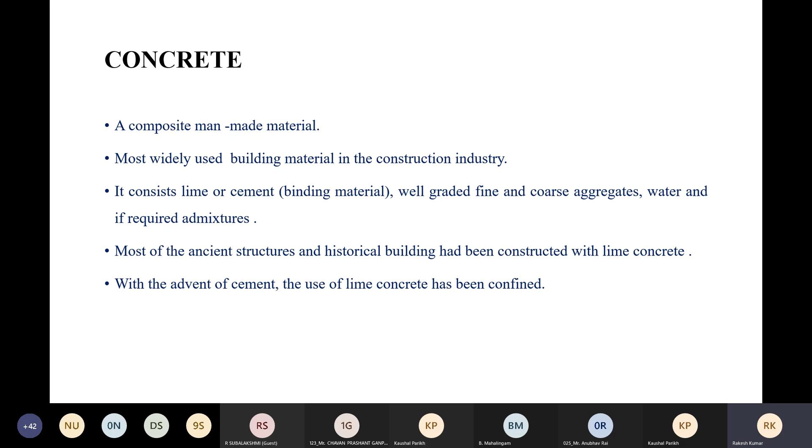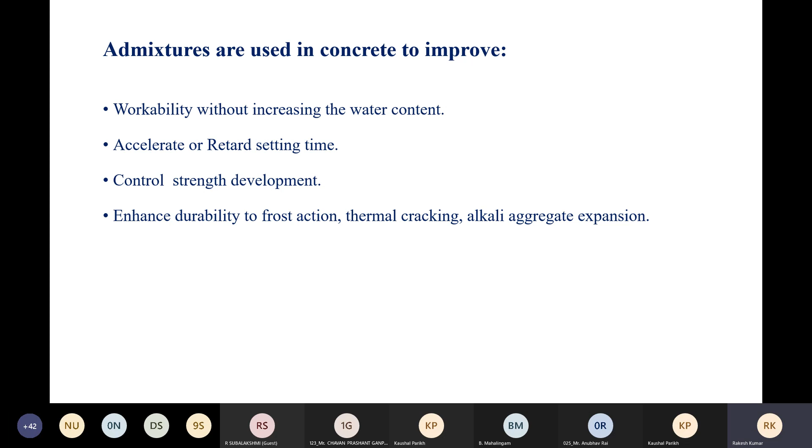Admixtures are used in concrete to improve workability without increasing water content, as accelerators or retarders to accelerate or retard the setting time, control strength development, enhance durability to frost action, thermal cracking, alkali aggregate reactions, sulfate attack, corrosion of reinforcement, reduce bleeding and segregation, and reduce the rate of heat evolution.

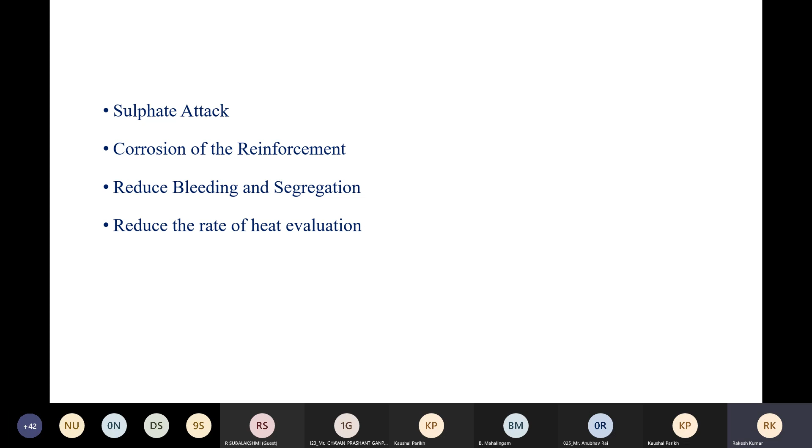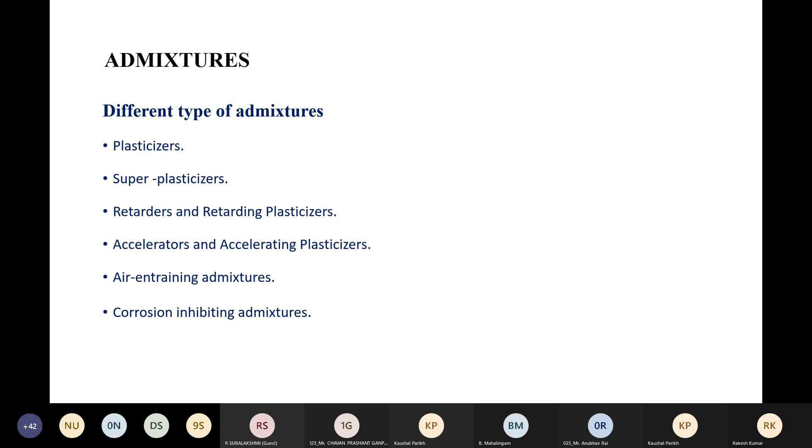Different types of admixtures are available in the market: plasticizers, super plasticizers, retarders and retarding plasticizers, accelerators and accelerating plasticizers, air entraining admixtures, corrosion inhibiting admixtures, damp proofing and waterproofing admixtures, gas forming admixtures, air detraining admixtures, alkali aggregate expansion inhibitor admixtures, workability admixtures, grouting admixtures, bonding admixtures, fungicidal, germicidal, insecticidal admixtures, coloring admixtures, and pozzolanic or mineral admixtures.

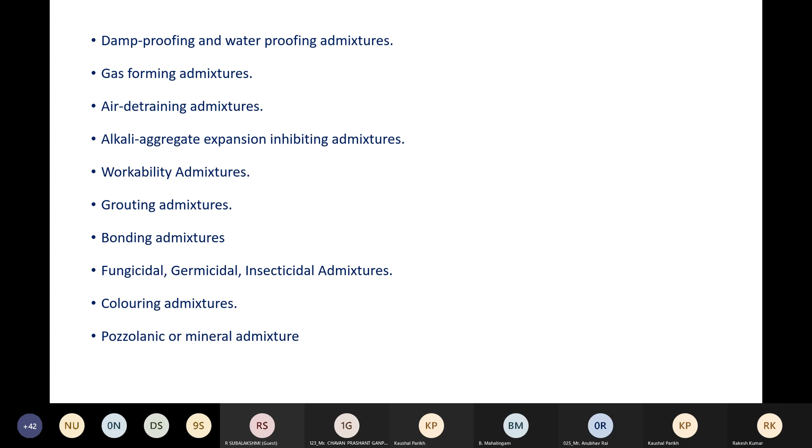Yes, it's fine from here. So in this, important is the pozzolanic or mineral admixtures. The use of pozzolanic material is as old as the art of concrete construction. It was recognized long ago that addition of suitable pozzolanas modified certain properties of fresh and hardened concrete. Greeks and Romans used certain finely divided siliceous material with lime to produce strong cementing material.

After the development of natural cement, that is Portland cement, the practice of using pozzolanas declined. But in more recent times, pozzolanas have been extensively used in Europe, USA, Japan, India, particularly in all developed and developing countries, and particularly in marine and hydraulic structures.

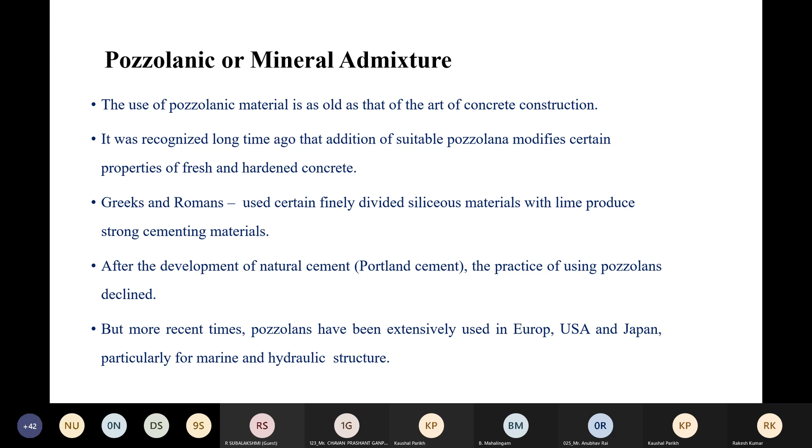So what is the improvement if we use pozzolanic material in the concrete? It lowers the heat of hydration and thermal shrinkage, increases water tightness, reduces alkali aggregate reactions, improves resistance to sulfate attack, improves workability, and is low cost. So here we can say if we use pozzolanic materials, we can improve the durability of the structure.

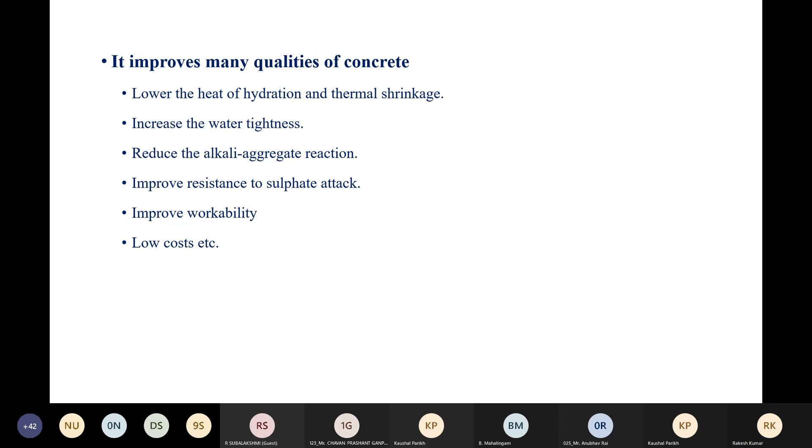So what is pozzolanic material? Pozzolanic materials are finely divided siliceous, or siliceous and aluminous material, which in themselves possess little or no cementitious value, but in the presence of moisture chemically react with the calcium hydroxide liberated on hydration at ordinary temperature to form compounds possessing cementing properties. So pozzolana plus calcium hydroxide plus water, when these three react, it forms the CSH gel. CSH gel means calcium silicate hydrate gel.

And what is the role of this calcium silicate hydrate? It plays a role in strength producing. So when you choose any pozzolanic material, whatever calcium hydroxide is liberated due to hydration, plus the moisture available in the concrete, that gives additional calcium silicate hydrate, and that is the main advantage of using pozzolanic material in the concrete.

So initially this reaction is low, so heat of hydration and strength development is also slow. The reason is, suppose you take the pozzolanic material fly ash - initially for 6 or 7 days it is in a dormant position, but when calcium hydroxide is liberated due to the remaining OPC cement, that reacts with the pozzolanic material, and in the presence of water it forms calcium silicate hydrate. So this reaction is low. Due to that, heat of hydration is low and strength gain is also slow.

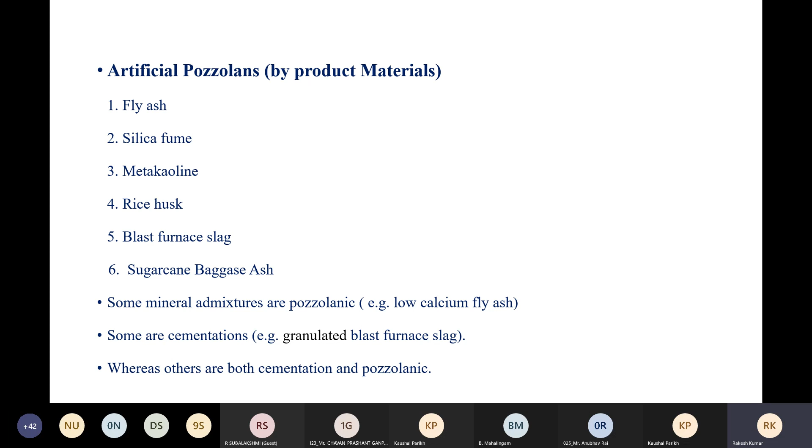Some mineral admixtures are pozzolanic, like low calcium fly ash. Some are cementitious - GGBS is a cementitious material, whereas others are both cementitious as well as pozzolanic material. So these byproduct materials are artificial pozzolanas.

Number one, fly ash. It is the byproduct of the thermal power plant. It is produced when finely divided powder resulting from the combustion of powdered coal, transported by the flue gases and collected by an electrostatic precipitator. Fly ash was first used in the construction of Hungry Horse Dam in America.

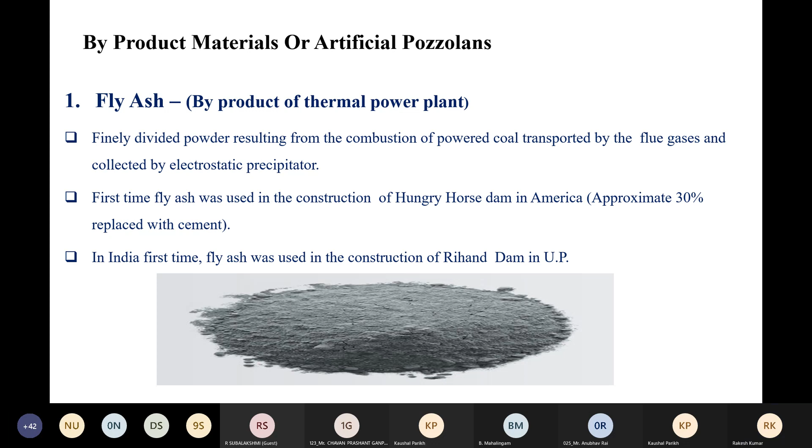In this, approximately 30% OPC was replaced with fly ash. If we talk about India, the first time fly ash was used in India was in the construction of Rihand Dam, situated in UP. If we look at the fly ash production scenario in India, at present around 100 million tons of fly ash is produced, but we are utilizing only 5 to 7%.

So it is a big problem for disposal. Now it has enhanced the consumption. So there are two ways to utilize fly ash. One way is to intergrind a certain percentage of fly ash with the cement clinker to produce Portland Pozzolana Cement. That is one of the consumed areas of fly ash.

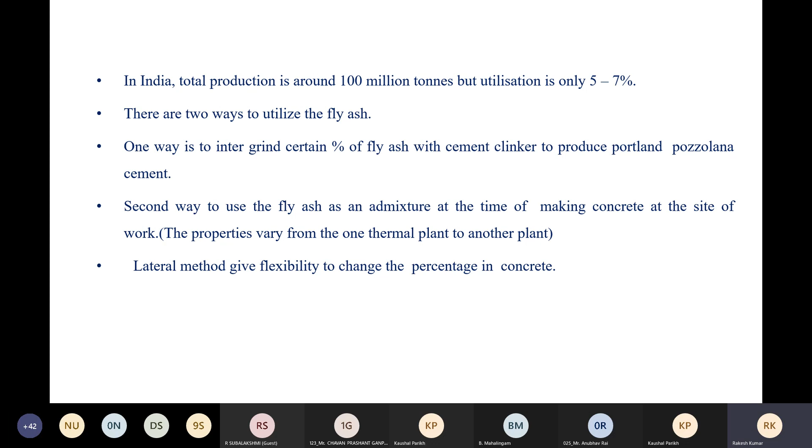Second way, to use fly ash as an admixture at the time of making concrete at the site. So one, intergrind. Second, you can replace OPC with fly ash. This second method, at the site, gives the flexibility to change the percentage in concrete - for mass concrete you can go about 40%, for structural purpose you can go for 20%. That flexibility you have in your hands.

Now fly ash is the finely divided powder we have already told you about. In the first category, it contains less than 10% CaO, calcium oxide, produced by combustion of anthracite or bituminous coal, called Class F fly ash, and has pozzolanic property only, with a high proportion of silica and alumina. Second category, produced by burning lignite or sub-bituminous coal, CaO content more between 15 to 40%, called Class C fly ash, possessing cementing property compounds such as C3A, C, and C4A3.

So here, if you see, Class F fly ash is used mostly for construction purposes.

The quality of fly ash is governed by IS 3812 Part 1, 2003, which covers the physical and chemical requirements of fly ash and its properties from different sources, shown in the tables. Before using fly ash for construction, we must check the requirements of this code, and if it fulfills the requirement, then we can use it for construction purposes.

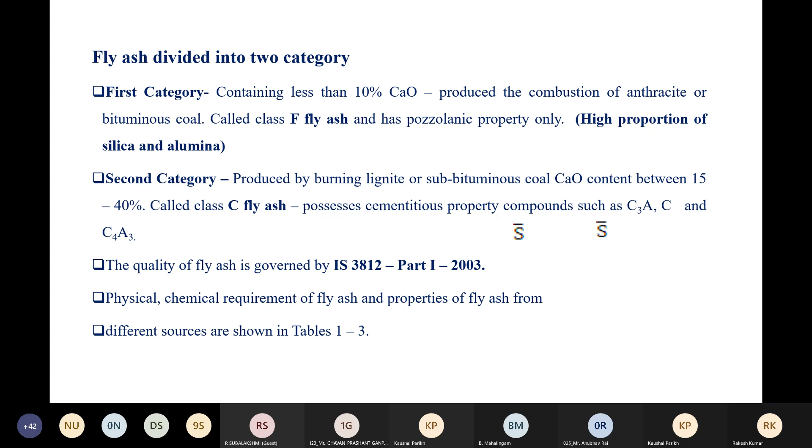The physical properties specified are: fineness 320 to 250, lime reactivity 4.5, compressive strength not less than 80% of the strength of corresponding plain cement mortar cubes, and soundness 0.8.

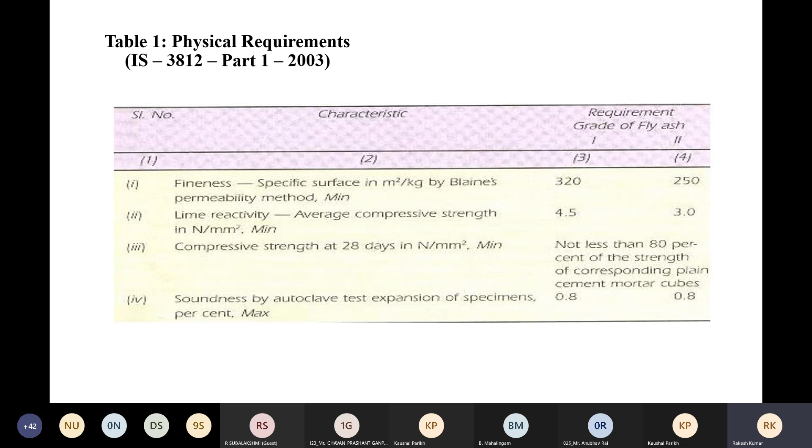For chemical requirements, SiO2 plus Al2O3 plus Fe2O3 should be 70% or more. If the sum of SiO2, Al2O3, and Fe2O3 equals 70% or more, it is known as Class F fly ash.

Further requirements include SiO2 minimum 35%, reactive silica 20%, magnesium oxide 5%, total sulfur as sulfur trioxide 3%, available alkalis 1.5%, total chloride content by mass 0.05%, and loss on ignition maximum 5%.

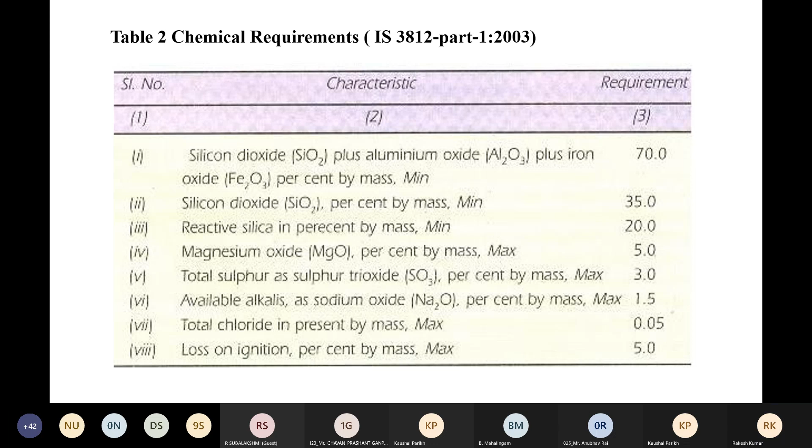Now, properties of fly ash from different sources. It is necessary before utilizing fly ash to be very careful to know about its physical and chemical properties, because these properties not only vary between different thermal power plants, but also vary between different units of the same thermal power plant. Here the different properties are given.

Specific gravity ranges from 1.91 to 2.25. Wet sieve analysis shows that the percentage retained, or fineness, is also different. For SiO2 content: in sample A it is 50.41, in the second it is 50.03, then 63.75, 60.1, with an overall range of 45 to 59.

So before using fly ash, it is necessary to check its physical and chemical composition, and it should follow the prescribed IS code. If the requirements are fulfilled, we can use it for structural purposes.

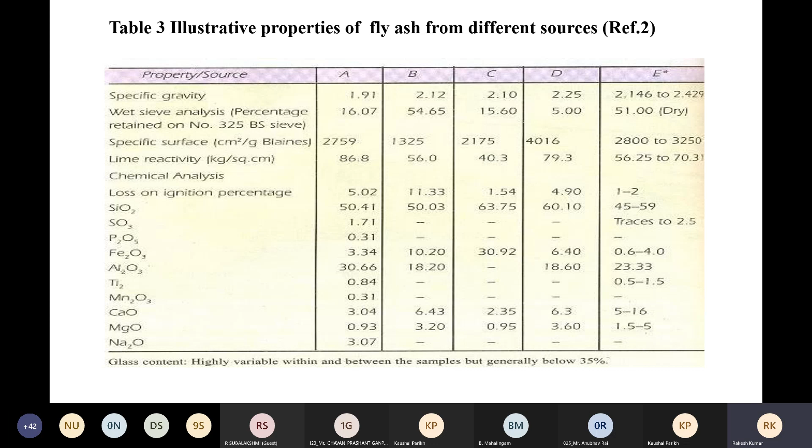Cenospheres are the most reactive. The particle size distribution varies from less than 1 micron to 100 microns, with more than 50% by mass less than 20 microns. This particle size distribution is shown in the next figure.

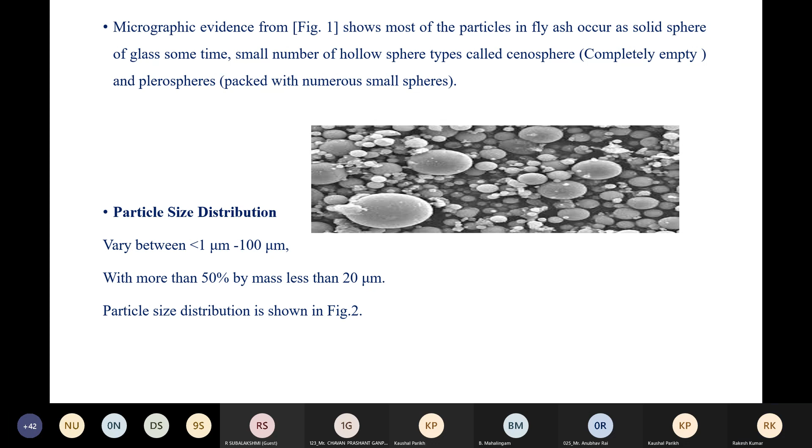Here you see a scanning electron microscope image of typical Class F fly ash, showing spherical glass particles. This is the plerosphere; these glassy particles are more reactive.

Comparison of particle size distribution: here you see ASTM Type 1 Portland cement, another is typical low calcium fly ash, and the third is typical high calcium fly ash. Here the range is given up to 0.01.

This is condensed silica fume. Its particle size is very narrow, and we will discuss condensed silica fume later on. Here the particle distribution is shown, which is finer than both cement and fly ash.

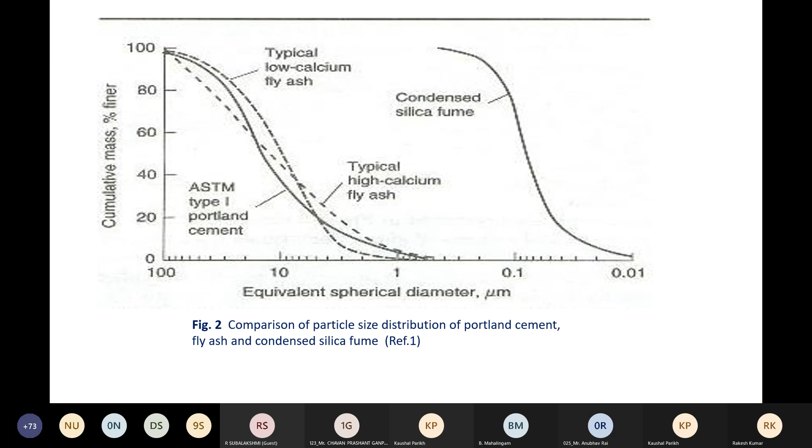Effect of fly ash on the fresh properties: what is the effect of fly ash on fresh properties? First, if we use the right quality of fly ash, it results in a reduction of water demand for the desired slump.

It is reported by Berry and Malhotra that if you replace 30% of cement with fly ash, 7% less water will be required in the concrete for equal slump compared to control concrete.

Fly ash decreases bleeding and drying shrinkage, and reduces heat of hydration, as we have already explained, because initially, for about 1 week, fly ash is in the dormant stage. So if you use 30% fly ash in concrete, only 70% of the cement (OPC) part will be in active mode, and the heat generated will be less than with 100% OPC.

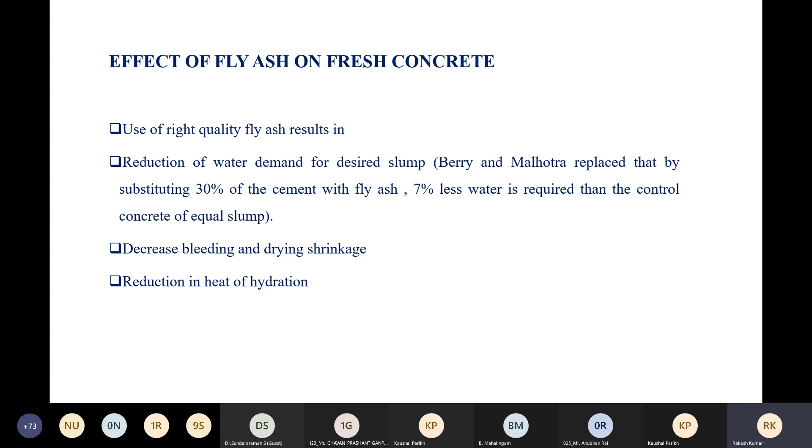Here you see temperature rise versus age. In the upper curve, no fly ash is used, and in the second curve, 30% fly ash is used. In the concrete without fly ash, temperature rises to around 30 degrees centigrade, but in the concrete with 30% fly ash, temperature rises to around 25 degrees centigrade.

So it is available in the literature that if you use mass concrete, we use certain pozzolanic materials so that the heat of hydration is reduced.

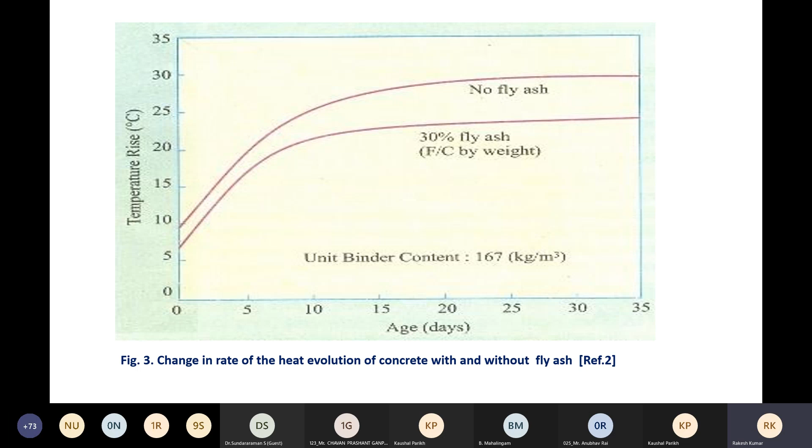Effect of fly ash on the hardened concrete. We get more strength due to pozzolanic activity, lower at early age, greater strength at later age.

As in the reaction, pozzolana plus calcium hydroxide liberated plus water forms the calcium silicate hydrate gel. Whatever calcium hydroxide liberated due to hydration, that is consumed with the reaction with the pozzolanic material, and additional calcium silicate hydrate is generated, resulting in the hardened concrete with a dense texture.

This is because the particle size is 1 to 100 micron, and around 50% of that is less than 20 micron. So it covers the small spaces available in the concrete, and we get the dense texture of the concrete.

Reduction in water and gas permeability. If there are fewer voids, permeability of either water or gas will be reduced. So if the permeability is less, foreign elements such as sulfate or chloride will not be introduced into the body of concrete, and it will make durable concrete.

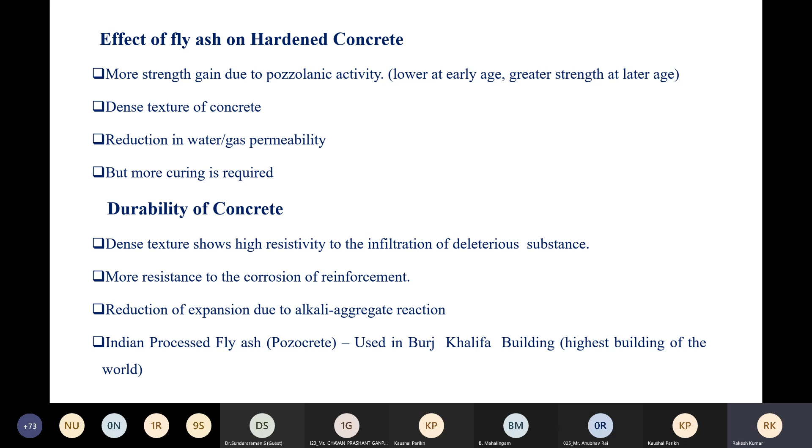Now the second pozzolanic material is silica fume, also referred as microsilica or condensed silica fume. It is produced resulting from the reduction of high purity quartz with coal in an electric arc furnace in the manufacture of silicon or ferrosilicon alloys.

Silica fume rises as an oxidized vapor. Condensed silica fume is essentially silicon dioxide, more than 90%. Any pozzolanic material's reactivity is based on the content of active silica available in that material, because the active silica will react with the calcium hydroxide liberated due to hydration, and in the presence of water, it will form calcium silicate hydrate.

Scanning electron micrographs are shown in this figure, with size less than 0.1 micron and surface area in the range of 15 to 25 meter square per gram. Minimum size of fly ash was 1 micron, but silica fume is 1/10 the size, less than 0.1 micron.

In the previous slide, we have shown the comparison between ASTM cement, fly ash and silica fume. So it is very fine. The particle size distribution is shown already in the previous figure.

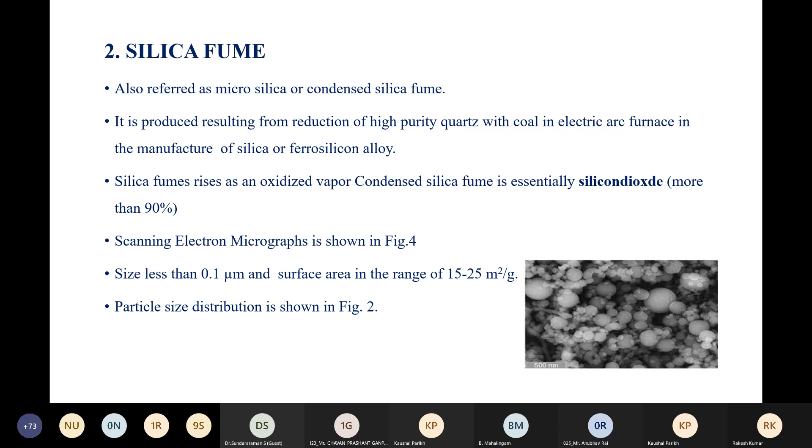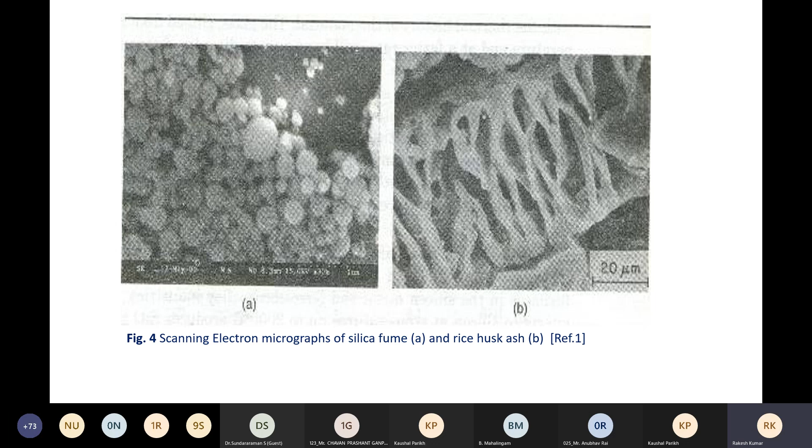Scanning electron micrographs of silica fume and rice husk ash. A is the silica fume and B is the rice husk, which is also another pozzolanic material. The pozzolanic action is the same: silica fume plus calcium hydroxide liberated due to hydration plus water forms the calcium silicate hydrate gel. This gel is dense and amorphous.

The physical and chemical properties are shown in the next table. What is the influence when you use silica fume in concrete? What is the influence on the fresh properties? Here, with silica fume, water demand increases.

In fly ash, as one study I have told you, if you replace 30%, 7% water demand decreases. But when you use silica fume, water demand increases because it is very fine. Addition of microsilica will lead to lower slump, but a more cohesive mixture.

It is vulnerable to shrinkage and cracking, because due to fineness it produces more heat of hydration at the initial stage, since silica fume is a cementitious, pozzolanic material. So heat of hydration is more. However, the total generation of heat will be less than the reference concrete, meaning concrete made with OPC.

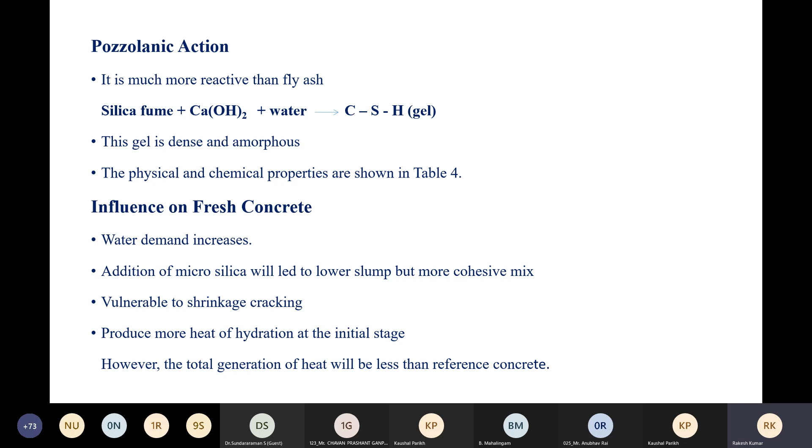Influence on hardened properties: microsilica shows outstanding characteristics in the development of strength. If you want early strength, in that case we use silica fume, and it increases durability due to fine texture. It enhances the durability of the concrete.

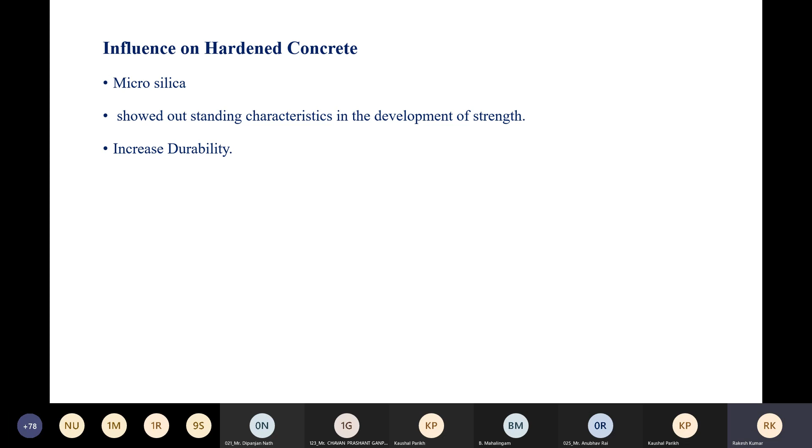Third is metakaolin - thermally activated ordinary clay and kaolinitic clay. This unpurified material is called metakaolin. It is not purified and it is not highly reactive. For highly reactive metakaolin, it is made by water processing to remove the unreactive impurities, and after that it becomes 100% reactive pozzolana - we get metakaolin.

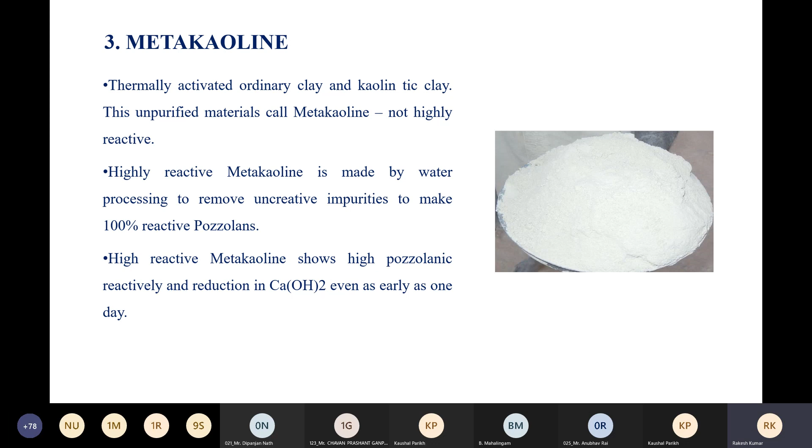So high reactive metakaolin shows high pozzolanic reactivity and reduction in calcium hydroxide even as early as 1 day. So if you take the processed metakaolin, its reactivity increases and it will give early strength. Addition of metakaolin enhances workability, durability, strength, resistance to crack and less permeability.

Because the fineness is more than cement, it improves the microstructure as well as decreases the calcium hydroxide content. From a durability point of view, minimum calcium hydroxide is required. So it is an advantage - whatever calcium hydroxide is liberated gets consumed by the active pozzolanic material, improving durability. There's dense packing, and the weaker zone at the transition zone becomes stronger. The reaction: metakaolin plus calcium hydroxide plus water forms calcium silicate hydrate gel.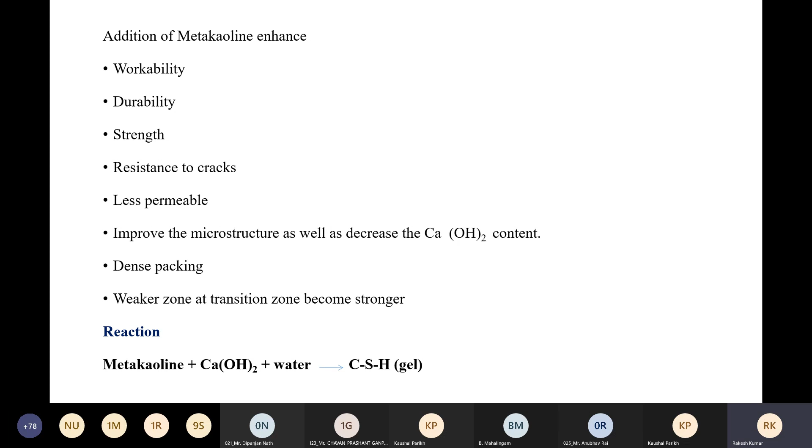Physical and chemical properties of metakaolin versus OPC: specific gravity 3.1 versus 2.5, mean grain size 22.5 versus 2.54. Specific area 3,250 versus more than 1.5 lakhs to 1.8 lakhs. If we compare silicon SiO2, it's 20.25 in OPC and in metakaolin it is 60 to 65. Aluminum oxide is 5.04 in OPC, here it is 30 to 34.

So, in total, this is the comparison of metakaolin with OPC.

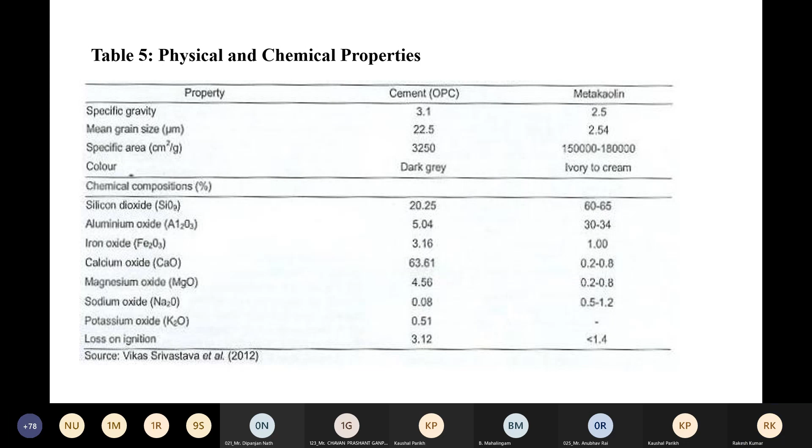Another material is rice husk ash. It is obtained by burning rice husk, burned in a controlled manner without causing environmental pollution. We have sufficient rice husk, and it creates environmental problems and disposal problems. So when properly burned, it has high silica content and can be used as a pozzolanic material in concrete.

So RHA contains amorphous silica 90% SiO2, 5% carbon and 2% potassium oxide. Specific surface of RHA is between 40 to 100 meter square per gram, meaning it is not as fine as condensed silica, but it is still quite fine.

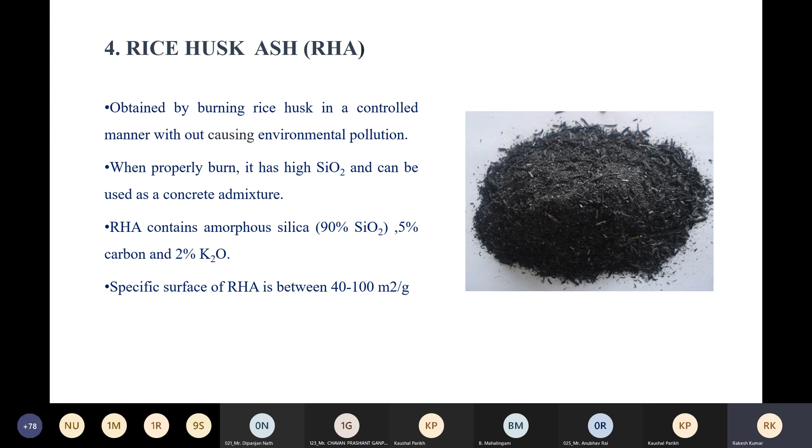Regarding production, if you take 1 ton of paddy rice, you produce 200 kg of rice husk, and after combustion you get 40 kg of ash. So if we burn 1 ton, we get 200 kg of rice husk, and that gives 40 kg of ash. In India, approximately 122 million tons of paddy is produced. Many researchers have reported that addition of RHA in concrete enhances mechanical properties as well as durability properties.

The spherical shape is shown in figure 4. Here you can see this is the shape of the particles of rice husk ash.

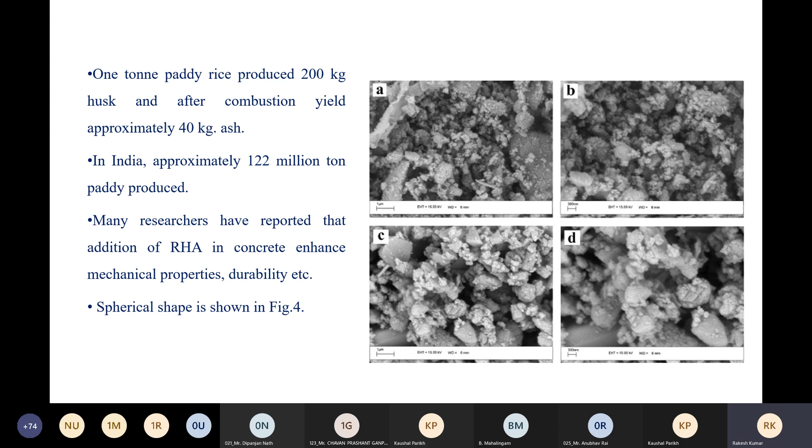After that, fifth is ground granulated blast furnace slag. It is a non-metallic product consisting of silicate and aluminate of calcium and other bases. The molten slag is rapidly chilled by quenching in water. This results in a glassy sand-like granulated material. When this granulated material is further ground, we get particles less than 45 micron. This glassy form makes GGBS more reactive.

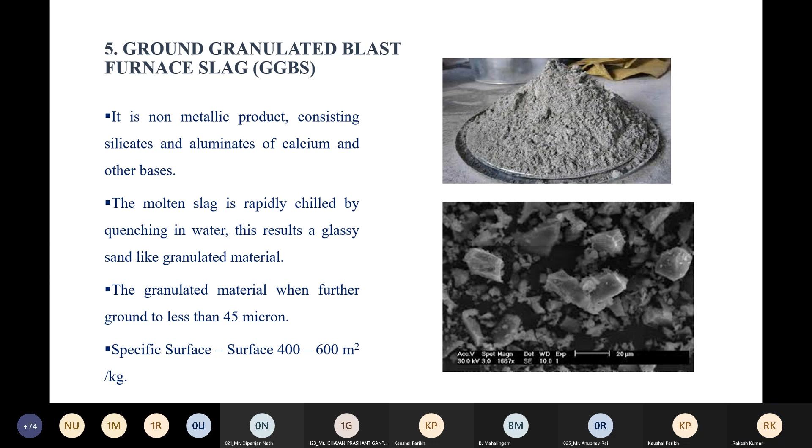Specific surface is between 400 to 600 meter square per kg, more fine. The chemical composition of GGBS: calcium oxide 30 to 45, SiO2 30 to 38, Al2O3 15 to 25, Fe2O3 0.5 to 2. In India, production is about 7.8 million tons of blast furnace slag.

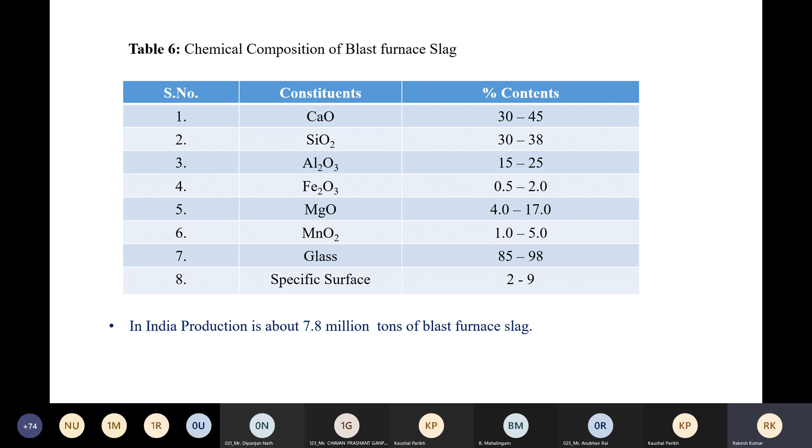After that, the next topic is sugarcane bagasse ash. It is a new pozzolanic material, and study on it is ongoing. As you know, we are a sugarcane producer country, so we have much bagasse available.

The main composition of washed, dried bagasse is cellulose, hemicellulose, lignin - that is 18 to 24%, and ash 1 to 4%. After extracting the sugarcane juice, a large amount of wet bagasse is yielded, around 30 to 34% by mass of collected sugarcane.

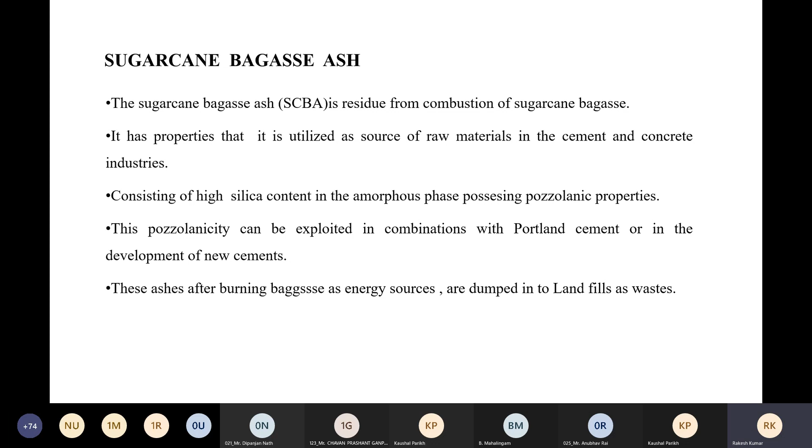So if we substitute and add it in Portland cement, we can use the properties of this sugarcane bagasse ash in the development sector. These ashes, after burning bagasse as an energy source, are dumped into landfill as waste. Approximately 62 kg of sugarcane bagasse ash is obtained by burning dried bagasse in a boiler at temperatures varying about 300 to 600 degrees.

So if you crush 1 ton of sugarcane, you can get 62 kg of sugarcane bagasse ash. When calcinated at temperatures between 600 to 700 degrees centigrade, it has high pozzolanic activity, which is generally associated with the formation of large quantities of amorphous silica.

So there is some effect of burning also on this. When my student did work on this, it was seen that if you go up to 800, 900, or 1000 degrees centigrade, the reactivity or pozzolanic activity of this SCBA increases.

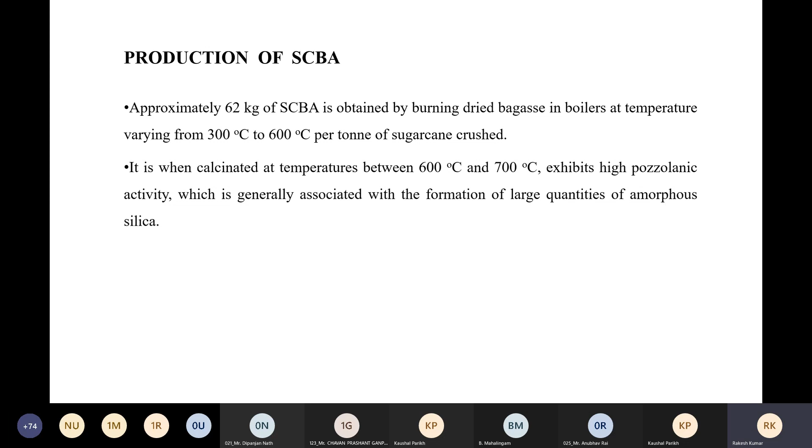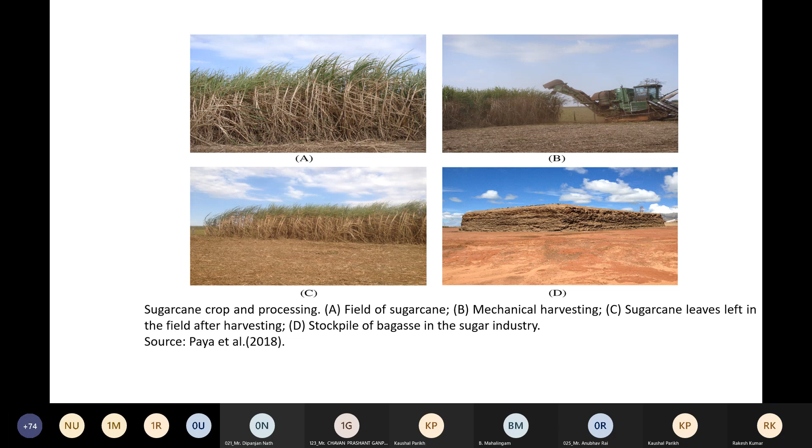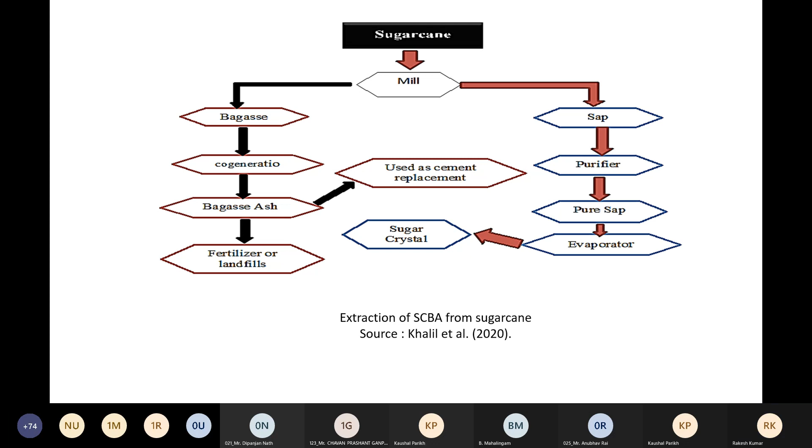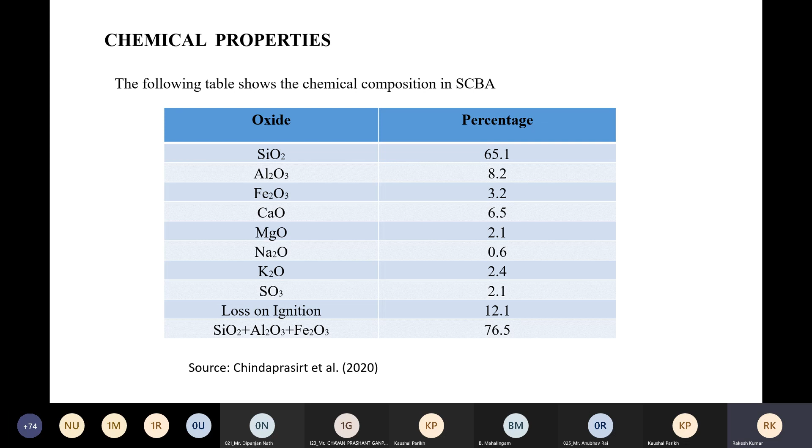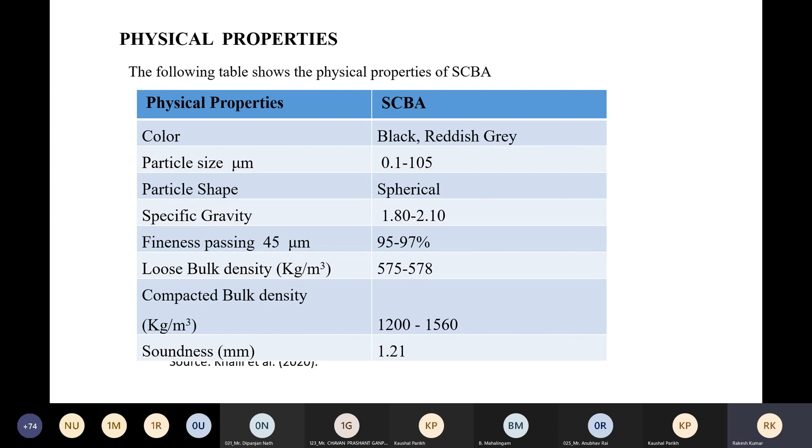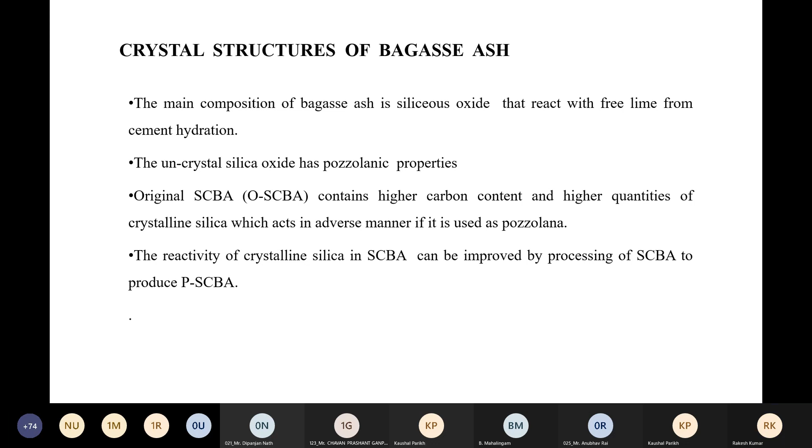Applications: it can be used as a mineral admixture, in making floor and wall tiles, in making bricks, in lightweight concrete, and it is a great source of silica.

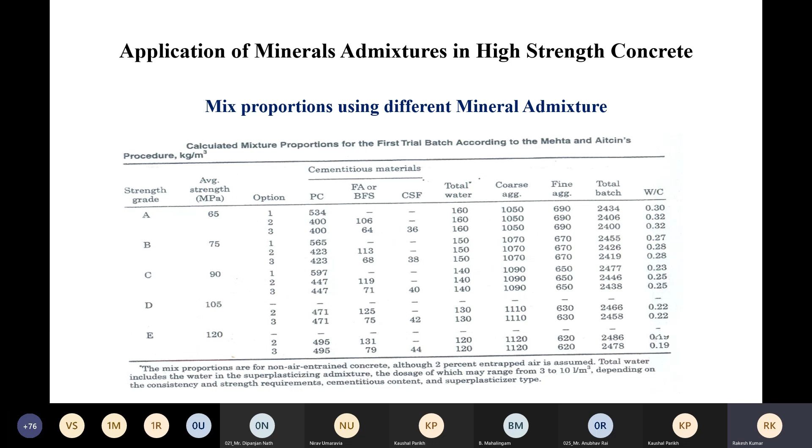As we go for higher strength, the water cement ratio decreases. So how to make the concrete workable? For that, chemical admixtures are required, which we will discuss. Using mineral admixtures as well as chemical admixtures, we can get good quality concrete that will be very fruitful for structures.

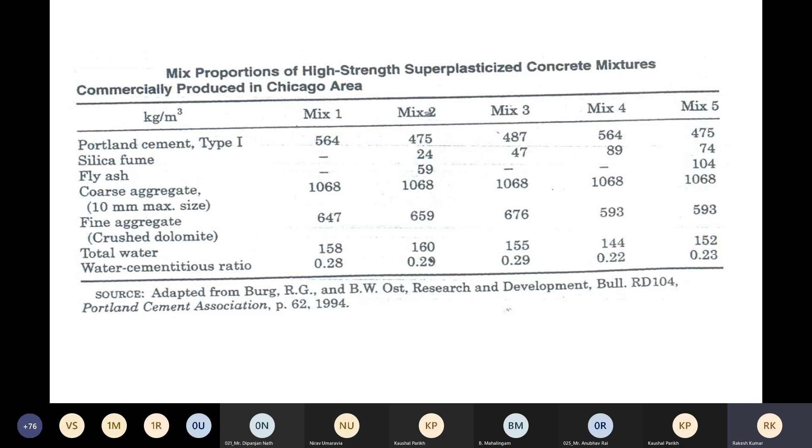There is another different mix here: Portland cement, then silica fume, then fly ash. Water requirements are 158, 160, 155, with water cement ratios 0.28, 0.29, 0.29, and mix 4 has 0.22, 0.22, 0.23. Here we use chemical admixtures to get proper workability.

Mix proportion of high strength concrete used in four different metropolitan areas of North America. In one mix: 400 kg Portland cement, fly ash 100 kg, coarse aggregate 1150, fine aggregate 590, total water 162, water cement ratio 0.33, and average strength is 56.

In the second case, cement is 360, meaning you can reduce OPC content. Fly ash content, the waste material, is 150. Coarse aggregate same at 1157, fine aggregate 603. Chemical admixture super plasticizer is used at 3 kg per meter cube, and total water is reduced. Using this super plasticizer, water demand reduced, so water cement ratio is 0.29.

The average compressive strength is now 80 Newton per mm square. Here, with more cement consumption, strength was only 56. But using less Portland cement and increasing the fly ash content - which is treated as waste material - with only a change in water demand, reducing it and adding super plasticizer, you get strength of 80 Newton per mm square. Same in mix 3, water cement ratio is 0.3 and strength is 82.

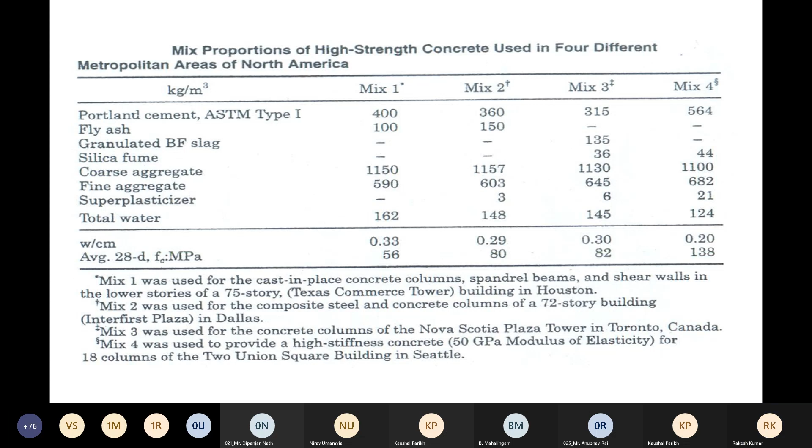So that is another table here also. You see mix 1, it is the strength gain 58.3 days, 58.3, 65.9, 78.6. Mix 2, mix 3, mix 4, as mix we have discussed. So here if you see tensile strength, that is also increases, modulus of rupture, that is also increases.

So drying shrinkage, that is reduced, and rapid chloride permeability test, the results that is shown in this case. Here in mix 1 it is 2570, but in another it is 650, 580. So means if you increase the pozzolanic materials, it will give the favorable result, means increase the reduction in the rapid chloride permeability, drying shrinkage.

So other mechanical property that is enhanced, and we use in the proper concrete for the durable, and this results in the durable structure.

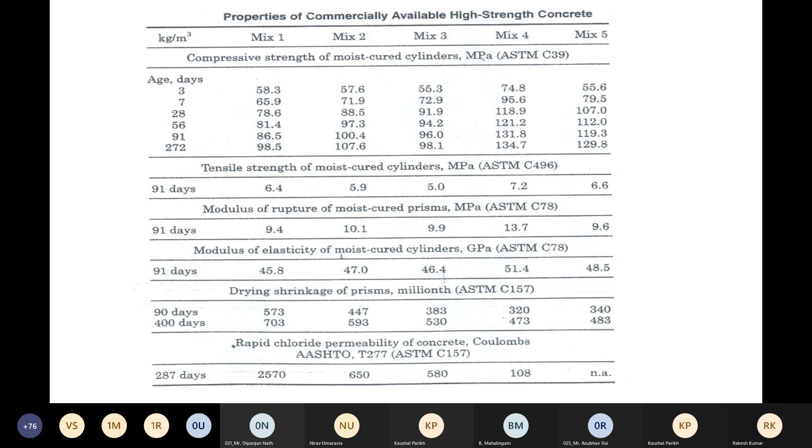Now we come to the chemical admixtures that we have discussed in the previous 2-3 mixes. What is the role of the chemical admixtures? So chemical admixtures, that is widely available in the market, but it is necessary that before using the chemical admixture, we first check the compatibility. It is not necessary each and every chemical admixture is compatible with a different type of cement. So in that case, compatibility is must before using the chemical admixtures.

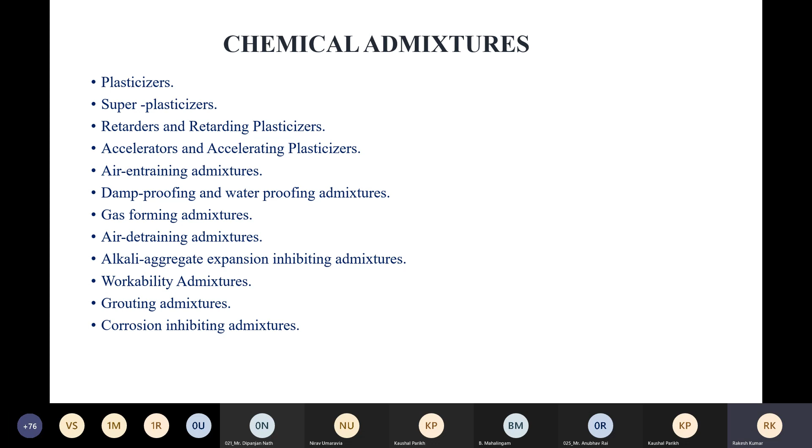So here plasticizer, super plasticizer, retarders, accelerators, air entraining admixtures, damp proofing and waterproofing admixtures, gas forming admixtures, air detraining admixtures, alkali aggregate expansion inhibiting admixtures, workability admixtures, then grouting admixtures, corrosion inhibiting admixtures, then other admixtures. So today we discuss about the super plasticizer.

So here by adding to a hydraulic binder, it gives very high workability and allows a large decrease in the water content for given workability. For a civil engineer, for a site engineer, it is necessary that whatever concrete you are providing in the structure, that should be workable. But if you see from the strength or durability point of view, it requires minimum water cement ratio. So that is the challenge, and this challenge is fulfilled by using the super plasticizer.

So what it does, it allows the particle to be more workable where it is enabled working with low water cement ratio. Using this, you have decreased the water cement ratio, but in that condition all the particles should be workable. So due to that we use the super plasticizer.

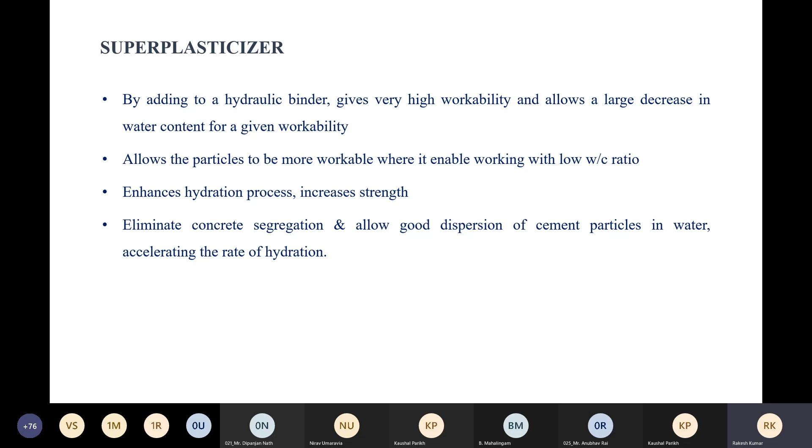Using this we will do another, uniform distribution of cement particle, that is partially responsible for high early strength in the concrete made with superplasticizer.

Advantage of using superplasticizers are decreased time to place and finish, accelerate curing period, and early removal of the formwork, because water cement ratio is less. Due to that, it gets proper strength in a shorter period.

Excessive doses may render concrete too fluid, causing severe segregation. So it is not necessary that if you are not getting the proper workability, you add more dose, more dose, more dose. That will affect the initial setting time, as well as segregation will also cause.

So when we use the chemical admixtures, we must be very careful. Generally, industries give the maximum dose of the superplasticizer or other chemical admixtures. If you are not getting the required property, in that case, you take another combination, either by the artificial pozzolanic admixtures or with the chemical admixtures. But our aim is to get a good quality concrete.

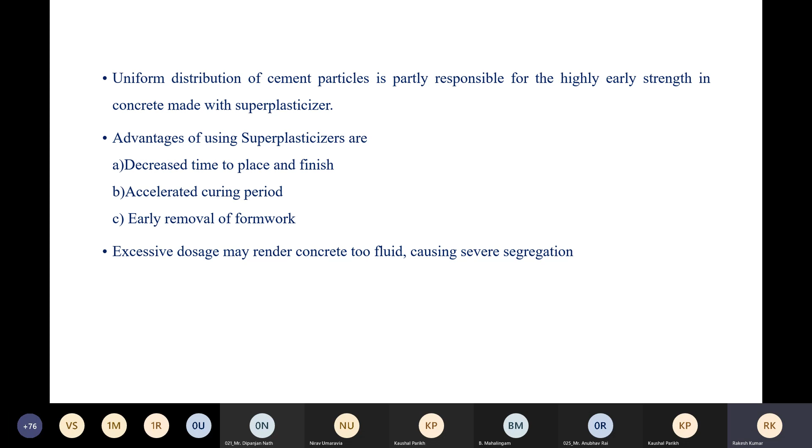So here you see what the superplasticizer does. Here you see flocculated cement particles, these area. But when you add the admixtures, in that case, the particles disperse. Photomicrographs of flocculated cement particles in Portland cement water suspension with admixtures - now it is dispersed. So as the open surface area will be more, in that case, reaction will be fast.

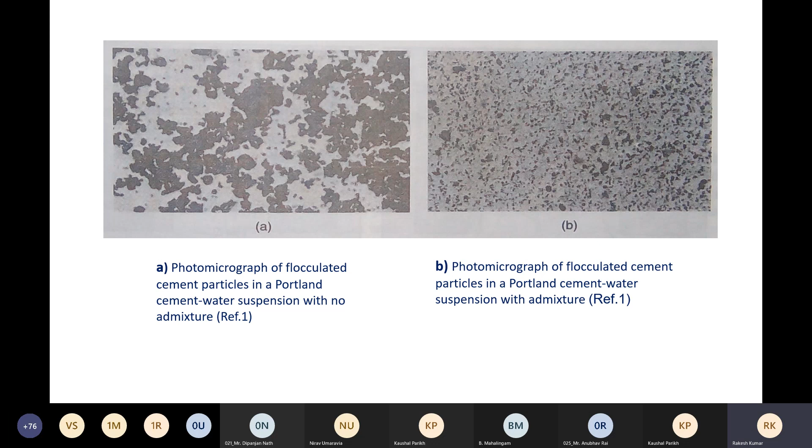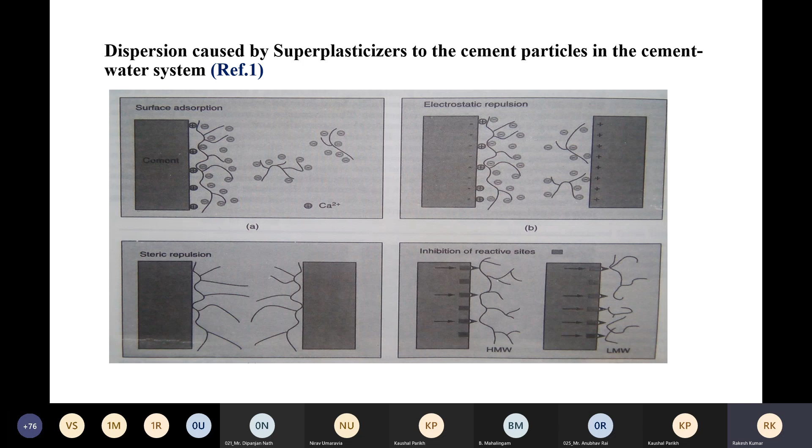Now, second, surface active chemicals. Surface active chemicals cover admixtures generally used for air entrainment and water reduction in concrete. Surface active admixtures consist essentially of a long chain of organic molecules, one end of which is hydrophilic, meaning it attracts water, and the other is hydrophobic, which repels water. The hydrophilic end contains one or more polar groups such as COO, SO3, NH3.

Surfactants used as air entrainment admixtures generally consist of salts of wood resins, petrochemicals, and some synthetic detergents. Surfactants used for plasticizing admixtures usually are salts and modifications derived from lignosulfonic acid, hydroxylated carboxylic acid, and polysaccharides, or a combination of the above three. So here chemistry people or chemical engineers have the main role to develop the chemical admixtures, and as civil engineers we use them in the concrete.

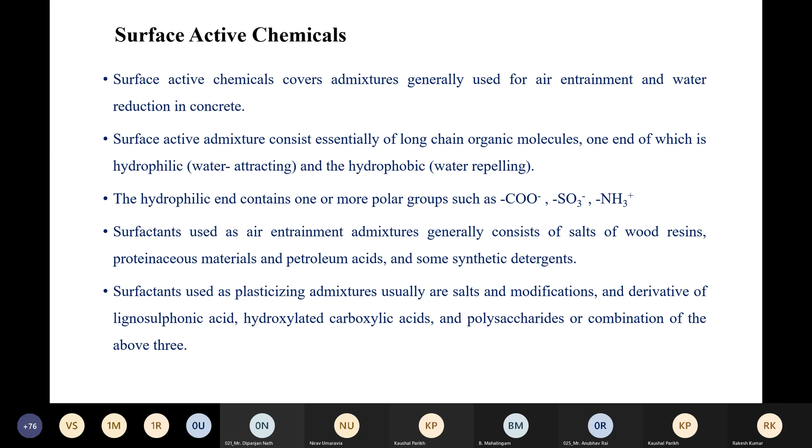So seeing all the properties, we can say air entraining admixtures make concrete contain air in a rather special form of bubbles that are trapped in the concrete. So here we get bubbles, and by that we entrain the air. Workability is improved, slump will increase, there will be easier placing, and because there is no space, only bubbles are there, in that case there is increased durability and better resistance to frost action, and the ability to reduce segregation tendency and control bleeding.

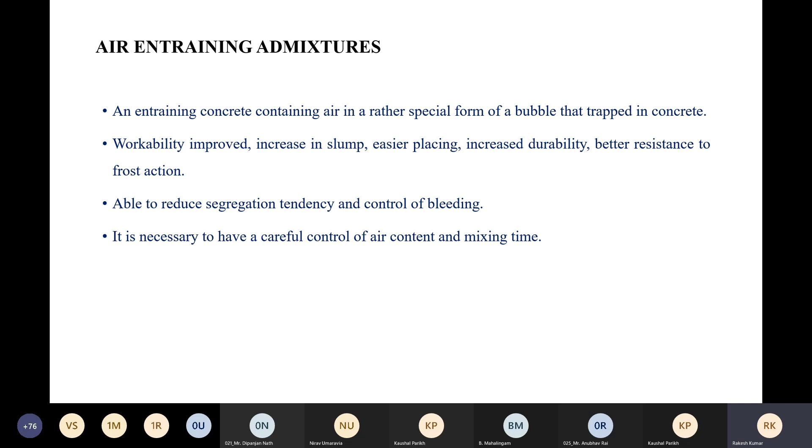With less water, there is no free water in the gap, so less bleeding occurs. So it is necessary to have careful control of air content and mixing time. When we use chemical admixtures, we must be very careful. Water-rich mixes tend to result in higher air content, while mixes rich in sand tend to have less air, because fine material content is more. If air entrainment is to be used, sand content needs to be reduced. Once you are using fine aggregate, there will be less free space for the placing of air in the voids.

So bubbles produced by air entrainment are quite different from entrapped air. We calculate entrapped air as 2%, or sometimes 1.5% we assume. But when you are producing bubbles in the concrete, in that case they are sealed and would not be filled with water during normal saturation of the concrete, and they are very small and well distributed. So that is the advantage.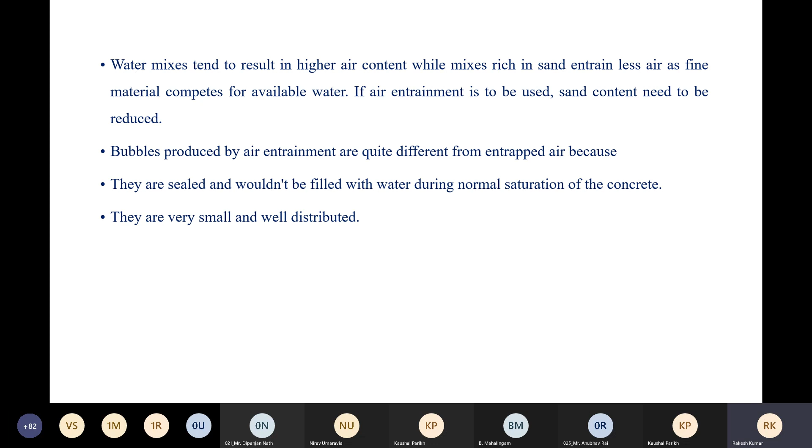Air entrainment is used to increase concrete durability by protecting it against freeze-thaw cycle damage, by entraining air in concrete to form a microscopic air-void system. The expansion is provided a relief valve system. The air-void system in the hardened concrete paste allows water to freeze, with the empty air voids providing room for the expansion that occurs as water changes to ice. So if you are providing bubbles, in that case there will be no water, so we can reduce the freezing of water, and thus reduce the freeze-thaw probability using this chemical.

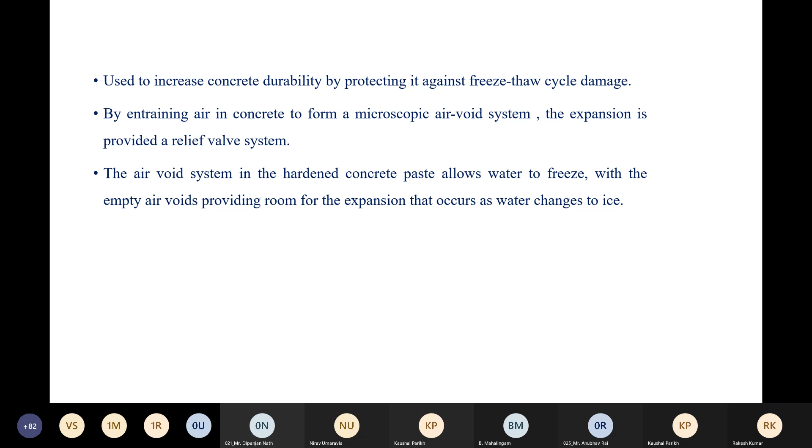So here it is given, CH3 and COOH particles, and here air comes between the cement particles. In this case you see it is closer, but when you use this, the gap is increased. So in this one there's a non-polar chain and a negative ion, and that is the function of these air entrained admixtures in the concrete. The formula of a typical air entraining surfactant is derived from pine oil. It is the mechanism of air entrainment when an anionic surfactant with a non-polar hydrocarbon chain is added to the cement paste, and the effect is shown in this figure.

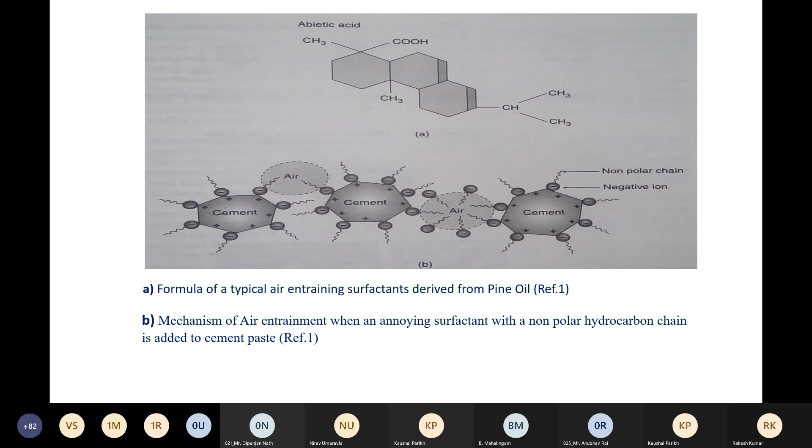Now, water reducing admixtures are plasticizers used to reduce the amount of water necessary to produce a concrete of given consistency, because workability requires slump. So to increase slump for a given water content, if you use the water reducing admixture and fix the water cement ratio, certainly slump will increase. To obtain a specific strength, a lower water cement ratio is needed, as per Abrams' rule: if you want more strength, the water cement ratio should be less. This gives increased workability with faster gain of strength, increased slump, reduced water content, and saves cement. That is another purpose, you can save cement.

The disadvantage of this admixture is that it has the risk of corrosion. So if we use the admixtures, we must be very careful. We use some mineral admixtures so that we get a dense texture, and by that, if we use chemical admixtures, they will not reach near the surface of the reinforcement, and there will be no risk of corrosion of the reinforcement.

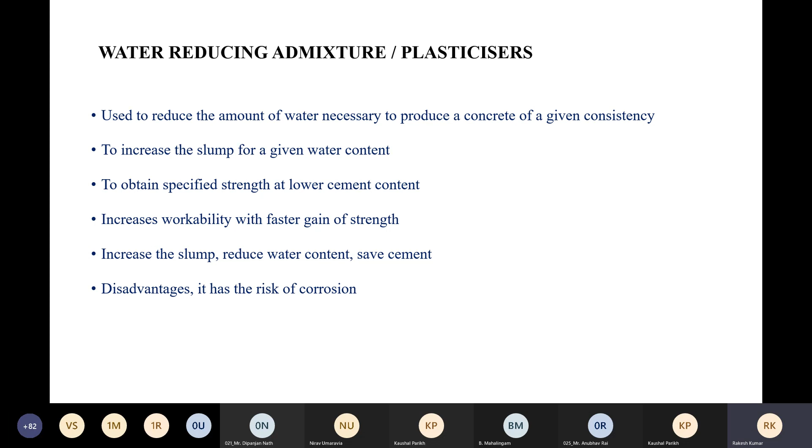When surfactant is added to the cement water system, the polar chain gets absorbed on the surface of cement. This reduces the surface tension of water and makes cement particles hydrophilic. So as the water will attract, reaction will start and reaction will be fast. So one thing, it disperses the cement particles, and after that attracts the water so that reaction will start.

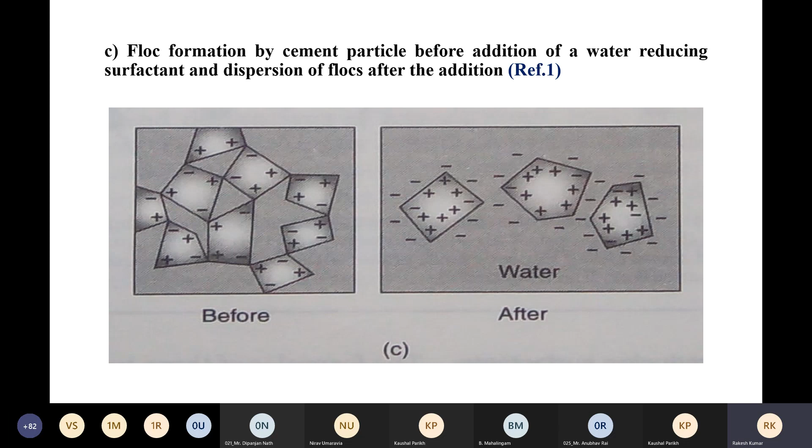Benefits achieved by using water reducing admixtures. Using this example, it is one mixture, that is a reference concrete. Cement content 300 kg per meter cube. Water cement ratio is 0.62. Slump required is 50. 7 days strength 25 MPa and 28 days strength is 37. That is your reference concrete.

After that, when we use the water reducing admixture, consistency increases. Cement content is same, 300. Water cement ratio is same, 0.62. But you have used the water reducing admixtures, slump increased from 50 to 100. And there is no more effect over the strength: 25 to 26, 37 to 38, because the water cement ratio is same.

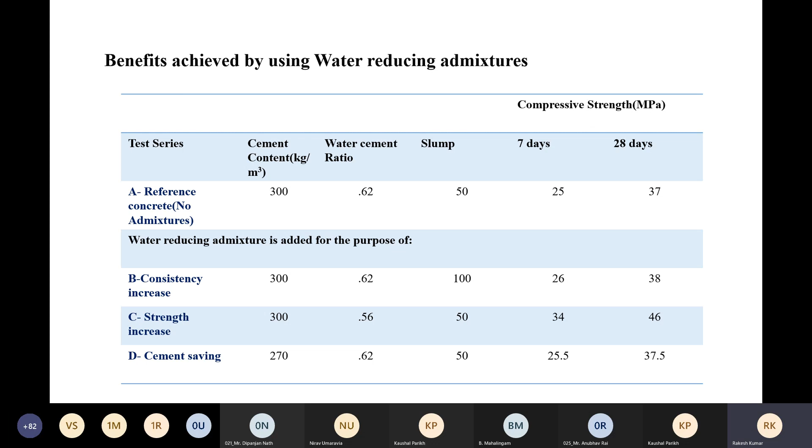Now another chemical admixture, that is the accelerator. It is added in the concrete to increase the rate of hydration of concrete mix, which then leads to increase in the rate of development of strength and greater heat evolution, and to shorten the setting time, more rapid gain of strength and rapid setting.

So if any industry is in working condition, you cannot shut down. So for a certain period, you take the shutdown and use the accelerator, you repair it, so that there is no much effect over the production of the product in that industry.

Disadvantage is possible cracking due to more heat of evolution and possibility of corrosion of embedded reinforcement. So you see, if you use this, such type of problem will occur. So you take the proper steps so that there is not much heat evolution.

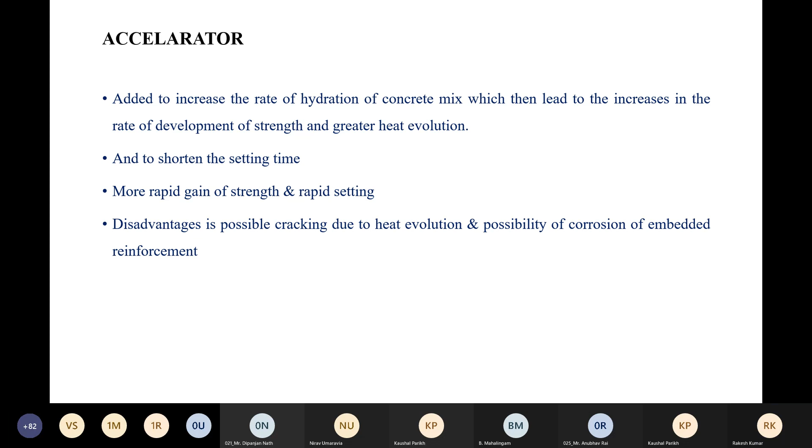And another is retarding admixtures. It is used to prolong or delay the setting time of cement paste in concrete. It is used in hot weather to reduce any premature stiffening of the concrete and consequent loss of workability.

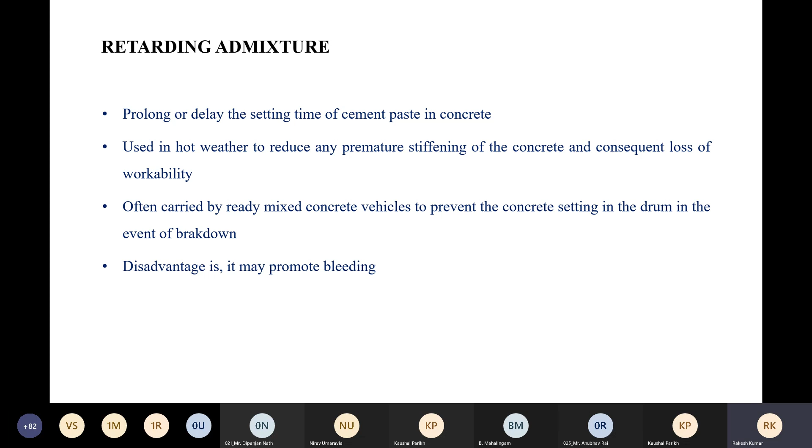It's often carried by ready-mix concrete (RMC) vehicles to prevent the concrete setting in the drum in the event of breakdown, depending on the distance of the RMC. The disadvantage is it may promote bleeding in the concrete. So if your RMC is 2 hours away, you can use retarding admixtures so that you can properly place the concrete at the site.

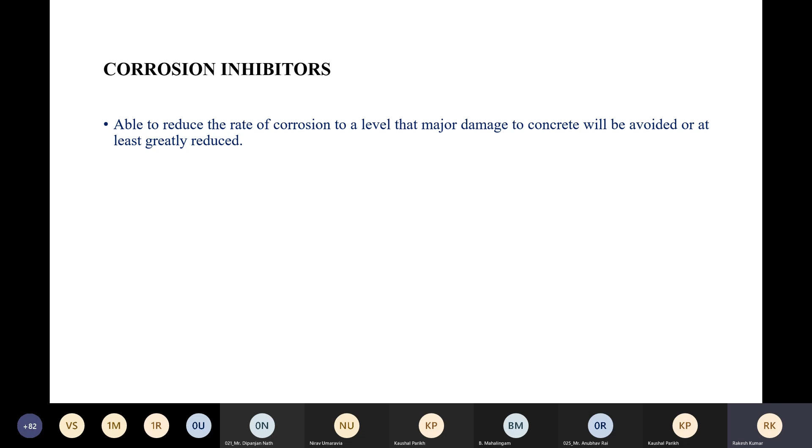Corrosion inhibitors are able to reduce the rate of corrosion to a level that major damage to concrete will be avoided or at least greatly reduced. Once corrosion starts, the volume of oxides increases and creates pressure over the surrounding concrete, so initially cracks start, then spalling starts. To avoid this, we use corrosion inhibitors, mostly in the presence of moisture where this corrosion initiates. So we can use corrosion inhibitors in the concrete.

Alkali aggregate reaction inhibiting admixtures: lithium and barium salts can reduce the expansion and cracking associated with the alkali silica reaction.

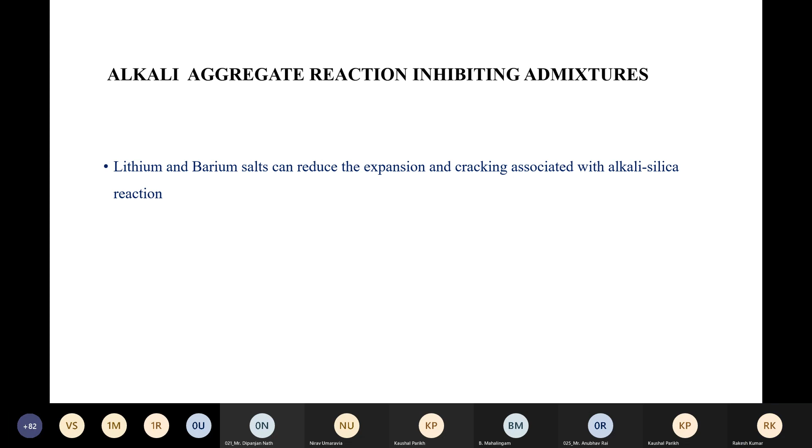Shrinkage reducing admixtures are able to reduce the amount of shrinkage that occurs as hardened concrete dries.

So by this we have discussed some mineral admixtures and something about chemical admixtures - how to use mineral admixtures, what are the advantages and disadvantages. After that we use one pozzolanic material, or two, or three - binary, ternary - taking the advantage. In some cases slump increases, in some cases water demand increases. So to make a balance, we can use such mineral admixtures and chemical admixtures, different types of chemical admixtures and their uses, that we have discussed.